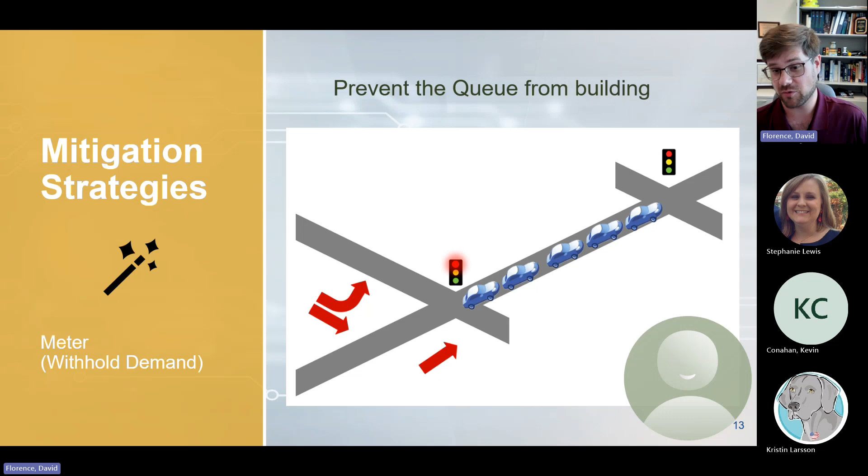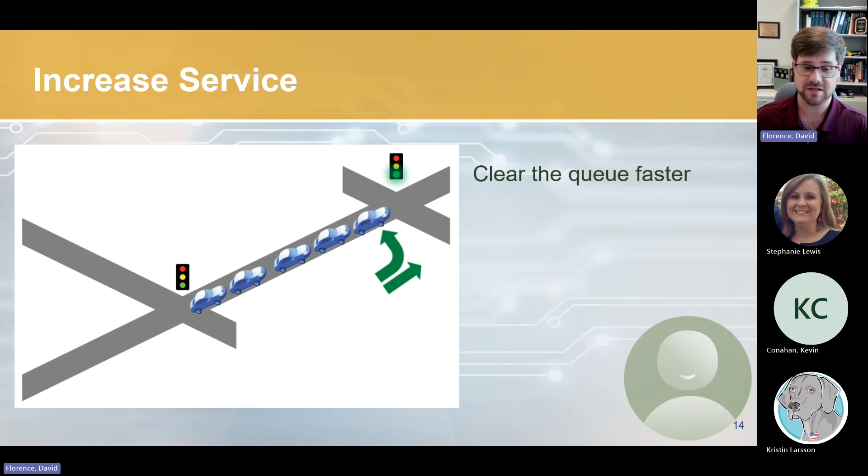But of course, that can't be all that we do. We also want to increase service because there's clearly more demand on that subject link. So the idea is to allow the vehicles in that link to proceed, allow them more service. And then the real question is, do we do both? Do we do one? Do we do the other?

And there was actually some previous research done on this subject in another NICER effort preceding this one, where we looked through this in simulation. And we ran some simulations to pursue this. This effort was about not only continuing that simulation, but deploying what we found, which was a queue flush strategy.

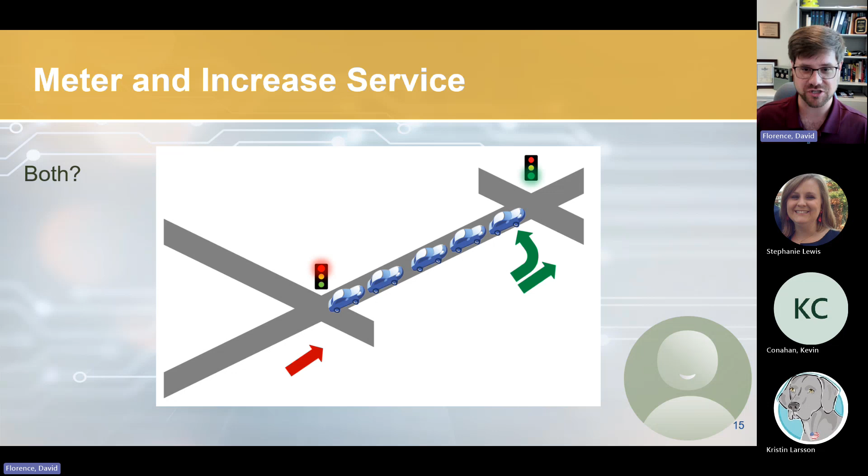So the other question is, well, what else? What if we retime the intersections? What if we look at different things? What if we do some combination? So the risks as we try to address this: only withholding demand could still waste green time in the other direction. So you might be giving a green light to a direction that has storage upstream, but if there's nobody there, then that's also not really a win.

Only clearing the queue could prevent service from conflicting movements. So that means that, in that previous image, there could be heavy traffic on the other movements that aren't experiencing starvation of green, but they're still experiencing cycle failures. So only clearing the queue could create a situation where we're prioritizing one direction. We really need to be thinking about the whole network.

Implementing both strategies could cause the most disruption. So if we do both, then we're metering and we're flushing, and this could lead to the intersection falling out of coordination if it is in coordination, and so on. And changing plans needs to account for, in this case, trains, which I'll review in a future slide.

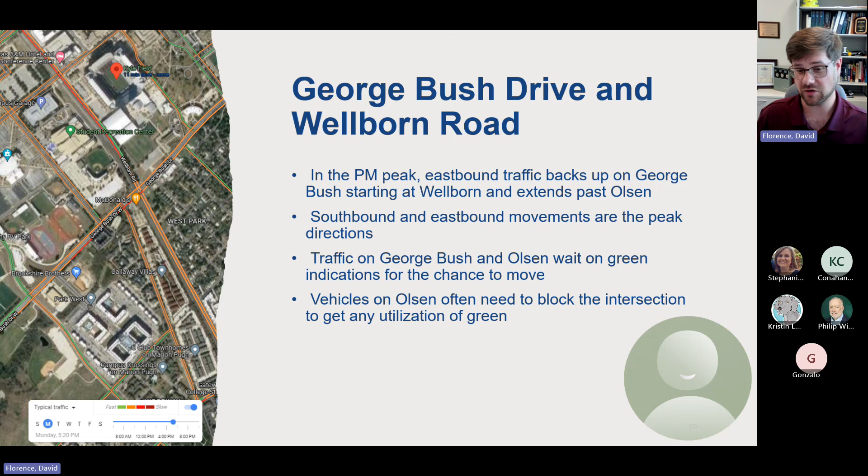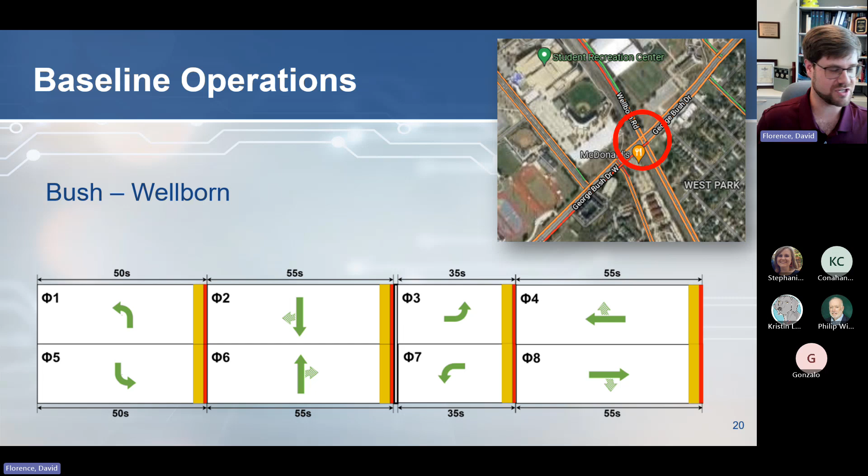And another thing of note is that there is an active rail line going along Wellborn. It runs in parallel to Wellborn across the city. This rail line receives upwards of 20, often closer to 30 trains a day. So this particular testbed does not run in coordination because of the frequent preemptions caused by rail, and occasional preemptions caused by fire and emergency services. The city found that if it runs in coordination, it just remains in transition for the entirety, which isn't really helping.

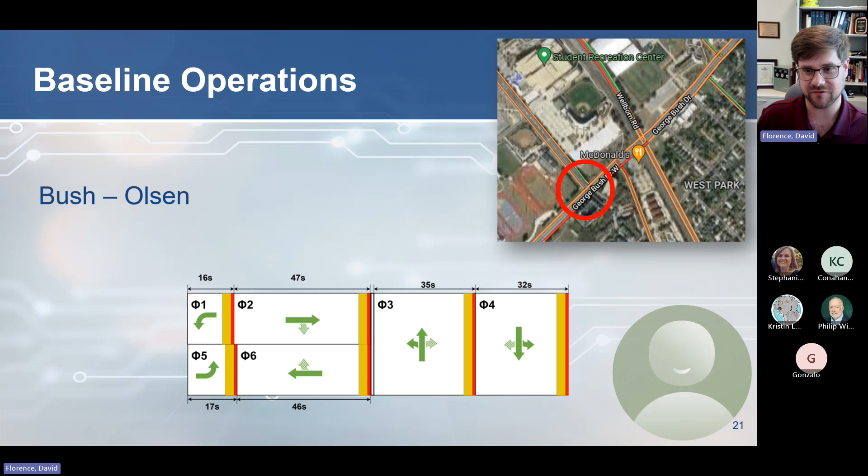Phase 3 is coming out of the apartment complex just to the south of the intersection. This isn't a heavy movement, but it's still allotted a certain amount of time. It's really allotted as much time as it is to allow for the pedestrian movements because there's heavy pedestrian traffic. Again, for Aggies entering campus, a lot of folks will cross here. Phase 4 is that southbound phase I was talking about, that vehicles will be waiting for the green indication.

So what does it look like when these vehicles are experiencing starvation to green? We see these pretty long queues and folks sitting there, and it looks like my GIF is going to work over line. They're sitting there and getting frustrated and just waiting and wondering when are they going to get an opportunity to move. In this image, you can actually see some vehicles at a skew here. Those are turning vehicles off of Olsen that came and occupied the center of the intersection because that was the only way that they felt they were going to get any service.

So what did we do in this project? We did a field deployment. We deployed the metering and flush strategy in April 2023. We also used INRIX and ITERIS signal performance metrics available to us. The ITERIS metrics are available to us through the city, and we used high resolution data collected by the signal controllers to evaluate how the field deployment was operating. We planned a revision, and we also did some addressing of issues that we'll talk about.

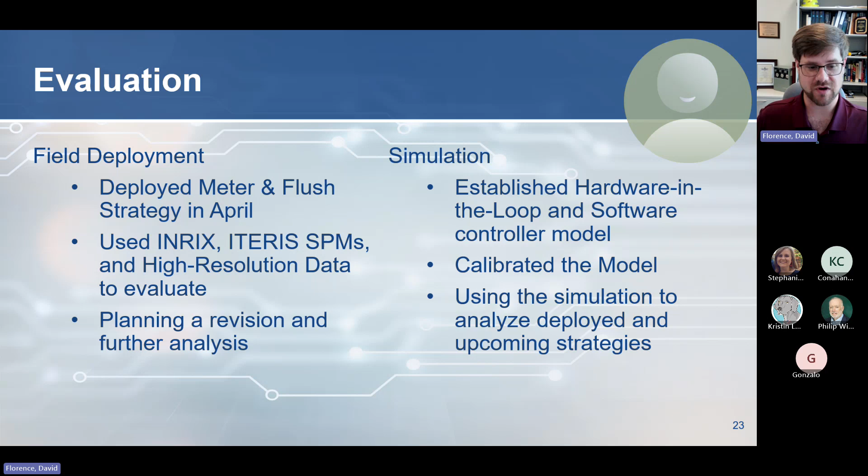And this project also involved a simulation effort where we used hardware in the loop to exercise some of the abilities of the controllers in the field. We calibrated the model, added some intersections, and we used simulation to analyze the deployment and upcoming strategies, kind of look through what is going to happen in that simulation environment before we put it in the real world.

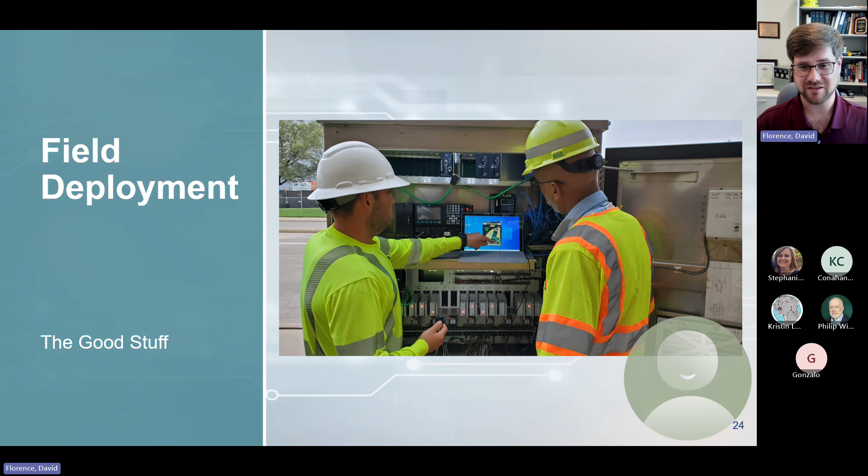So what did the field deployment do? Well, we went and we visited these two intersections. This image is of a fellow researcher of mine and the signal tech at College Station teaching us how the configuration is for the radar sensor that we use to detect the queues. That radar, well, we'll talk about the Aggie football first.

That's pretty important. So the original conditions: the city of College Station knew that this was a problem intersection. Like I mentioned earlier, this intersection tended to operate in free, because that kept it from being in transition constantly. So despite heavy traffic along Wellborn, it did operate in free. They found that this signal timing minimized complaints. They were receiving lots of complaints at these intersections, but when they made this really long signal, it helped relieve enough, I guess, that the complaints stopped.

And, talking about Aggie football, this is just south of Kyle Field. This signal timing allowed for easy operations for game day traffic. So they were able to convert and utilize game day strategies without needing to go and put a whole lot of effort into retiming the signals.

So establishing the queue flush, well, we used previous efforts that we did in another project, using ASC/3 signal controllers for simulation only. The challenge is that the city of College Station used Siemens M60 controllers. So there's just enough discrepancy between these two traffic signal controllers that it wasn't really a fair assessment or even a useful ability to simulate how these are operating, because the underlying structure and how you would code a queue flush strategy into these controllers were different.

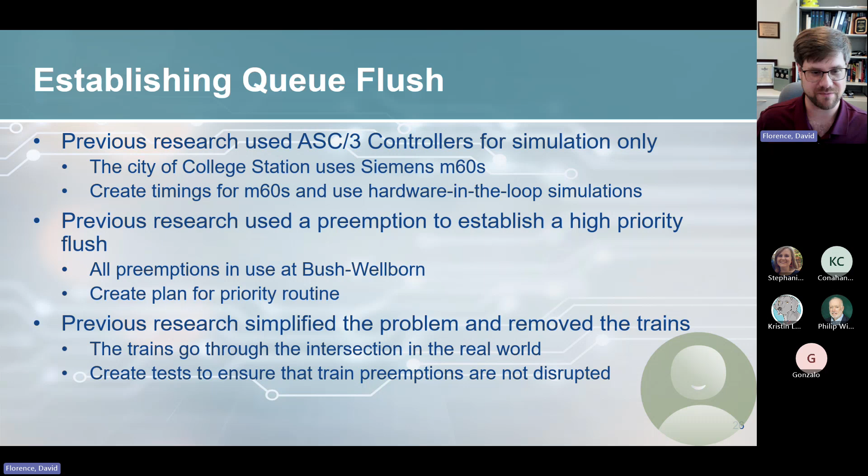So we created tests to ensure that train preemptions are not disrupted, that this priority routine is not going to stop the controller from somehow entering its preemption. And so we incorporate that in the simulation. This is actually an image. You can see the train a little bit in the background here, peeking over those vehicles. You can see the train in effect.

So now I can talk about the sensor that we used. To detect the queues, we utilize a sensor in the tip of the mast arm. This is actually pointed to service traffic on the other side of the roadway. This is pointed to service and detect vehicles on phase 6 going to the west. But it did have just enough range and just enough ability to actually detect vehicles below it. So it could point its radar and see vehicles in the area for the eastbound traffic.

And so we use this to do a couple of things. We did establish the meter traffic scenario, and we put dynamic phase omits for phases 2, 3, 4, and 5. Essentially all the movements that would be blocked or unable to move when this link was full and when that area was occupied.

We also used it to establish a flush at the downstream intersection using peer-to-peer. We did this by introducing some new phases. I'll talk about that a little bit in depth when I show the ring barrier diagram. And created a priority routine that calls these phases on the peer-to-peer communication between the two.

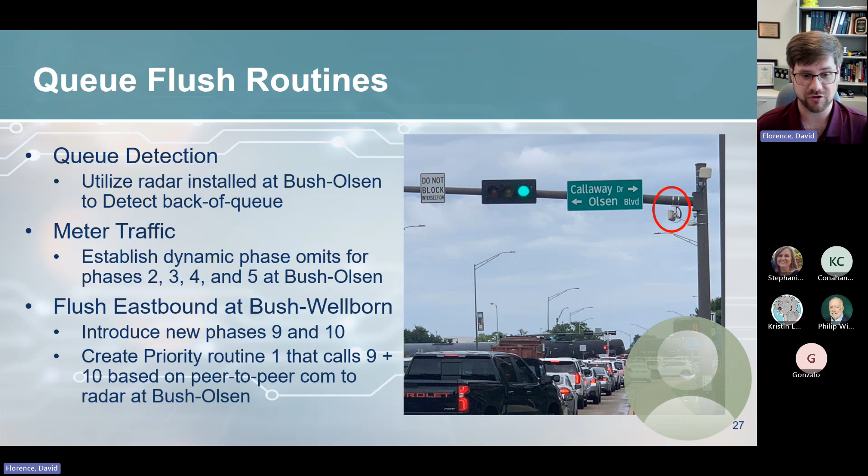So these phases were generated and they were only ever called by the peer-to-peer communications. There's no detector calling these phases. So as long as the link between these two intersections doesn't get filled, it would never service phase 9 and 10. This allowed the ring barrier structure to operate continuously and to remain in this way, but it wouldn't call phase 9 and 10 until there's sufficient traffic or detection.

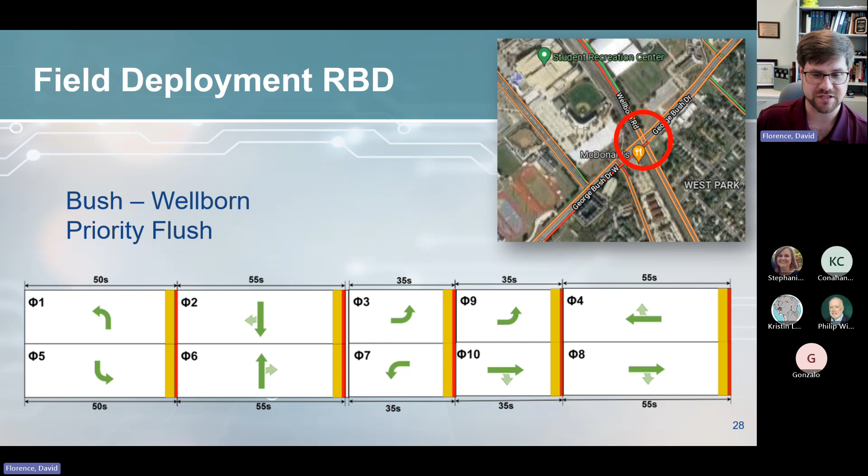Again, this is oversaturated conditions. Both of these directions have lots and lots of vehicles on it, especially in the beginning of the fall semester before traffic has died down and leveled out, and people have found their final routes that they prefer to take to and from campus. So this allows for when the flush ends, when phases 1, 5, 3, and 4 are no longer omitted, it would go to phase 2.

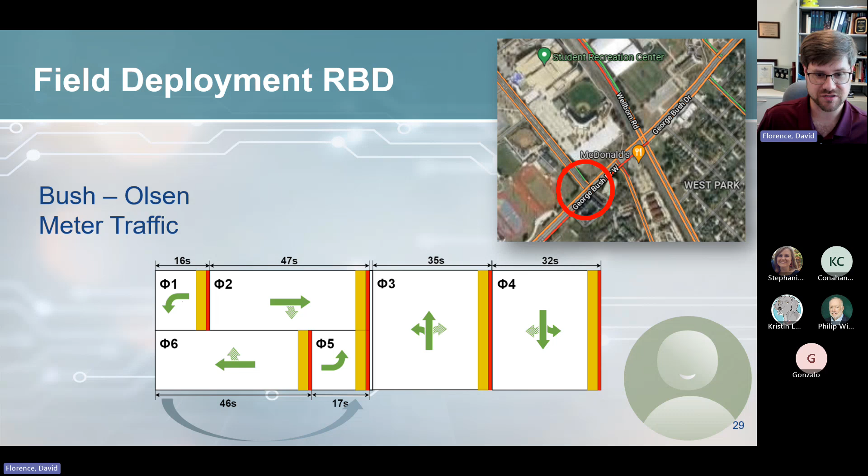So we deployed this on April 18th, 2023, after doing some bench testing and talking through with the city about how exactly it would work. We utilized the simulation and some scripted scenarios for bench testing to confirm that it would be able to operate successfully. During the field deployment, there's always something. We adjusted the radar sensor to help us better detect the queues. This was adjusting the parameters. That radar sensor that I showed in the earlier slide was configured to find stopped traffic.

It was able to detect the speeds of vehicles, and so it should have only actuated the queue flush if a vehicle was stopped, which we define as a speed less than 5 miles per hour, and if it was underneath the mast arm. So in that region, that represents the queue is full. So we tried different methods for establishing metering. We had some hiccups on the deployment, and we did eventually find a way to get it to work and

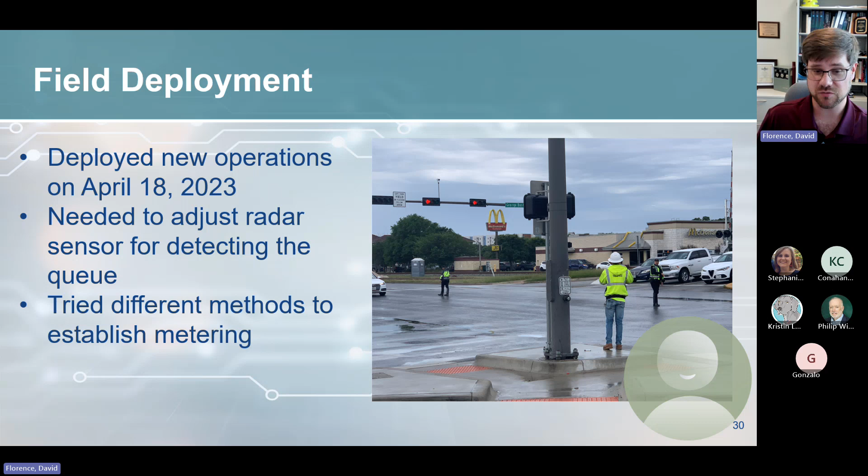operate it. So results and discussion, I'm going to show some of the results that we had from the field data and what we did in the simulation. I have some specs on the simulation here. Essentially, 1 hour simulation with a warm-up period, and we did 3 different scenarios. The baseline, which was what was out there before we deployed, priority flush, which is the strategy I just described, where we use the priority routine to do a queue flush with metering.

We also did a retiming scenario because we thought that the cycle lengths were very long. And so we did some simulation and looked at what it would be like if we shortened those cycle lengths. Even though that might reduce capacity overall, it's already saturated, and the idea was to keep vehicles moving. We did 10 simulation runs for each scenario.

I'm going to talk through first the field analysis. We used INRIX. INRIX was gracious enough to allow us access to their data and utilize that. We used their signal analytics tool, which they offered to us to compare probe vehicle data before and after deployment. So this is immediately before and after, comparing the 4 weeks previous to deployment to the operations after deploying the strategy. And we also did delay and travel time on road segments between 2023 and 2022, looking at essentially what it was like across the 2 different years.

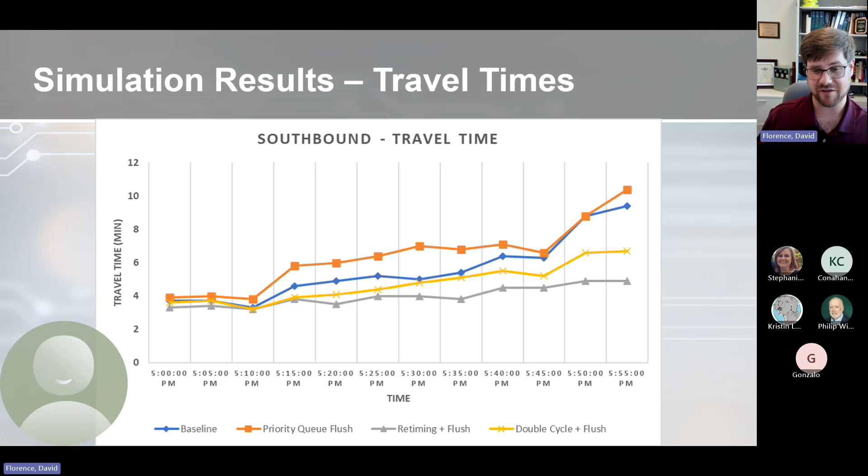And this essentially told us, one, that what we deployed could have made things a little bit worse for southbound traffic. Not a big surprise. It was nice to see that it wasn't making it much worse. And this indicated that the retimings and doing a double cycle would help keep that southbound traffic moving and perhaps improve on what the current operations were.

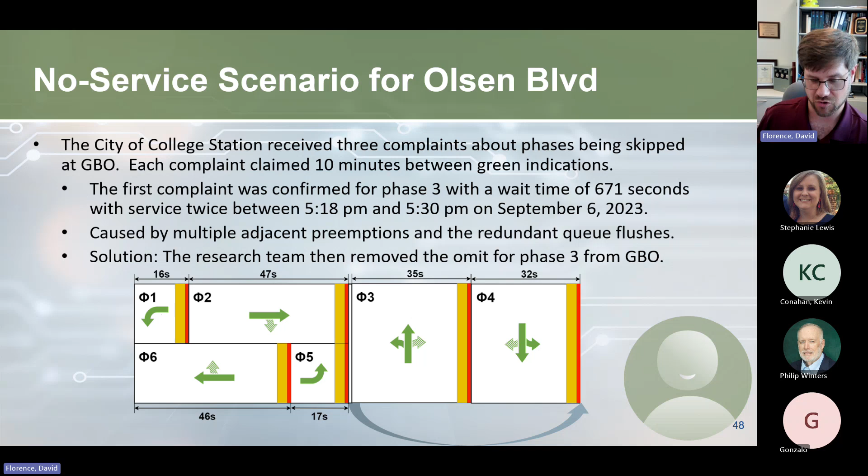The first thing that we did is we said, well, what if we rearrange phase 3, bring it after phase 4, and remove the omit from it, essentially allow vehicles coming out of the apartment complex to get some green time. The reason it was important to move it after phase 4 was, again, when the omits lift, when we stopped metering, we wanted to make sure that phase 2 came up before phase 4. So rearranging that ring barrier structure ensured that we'd be giving the additional storage to eastbound traffic as opposed to southbound traffic. We deployed that and thought things were dandy.

And then on October 12th and October 25th, we received additional complaints, this time for phase 4, also saying 10-minute wait times. We looked into it and found in the October 25th scenario that travelers were facing this no service, and the city actually recorded some video and confirmed that vehicles weren't receiving any service.

In the October 12th scenario, we also saw indications in the signal timing that vehicles weren't getting service. We looked for a different way to make more conditional metering, but did not find functions available in the traffic signal controller. So we ultimately wound up removing the metering strategy because it wasn't functioning, and we certainly didn't want to create a no service scenario for Olsen Boulevard where vehicles are waiting 10 minutes between receiving green lights, because essentially the takeaway was it's better to get a green light and not be able to go anywhere than to sit there for 10 whole minutes and not ever receive a green light.

We got unreasonable priority flushes. This is, again, something that we saw in simulation and saw during multiple field visits. We had a constraint for the priority routine where it wasn't supposed to happen more frequently than 360 seconds. Essentially 6 minutes between flushes. Again, we don't want to disrupt ambient traffic by constantly prioritizing the eastbound movement. However, we found that the signal controller would request 150 check-ins during a 4-hour peak period. It's like once every 96 seconds. It didn't really make sense.